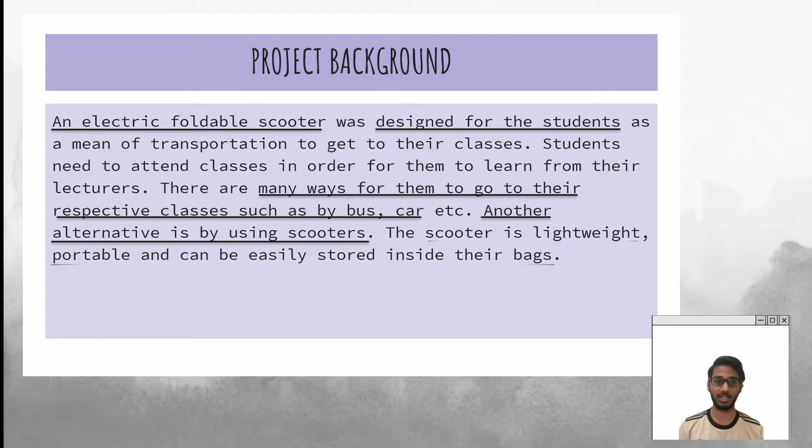Students will actually have many ways to travel, like bus, cars, and etc. But then they can use another alternative, which is these electrical scooters. Why? Because it is very easy to use, with average speed which can bring you from one place to another within a certain time, meaning faster. And it's portable - easy to be stored and you can bring it anywhere.

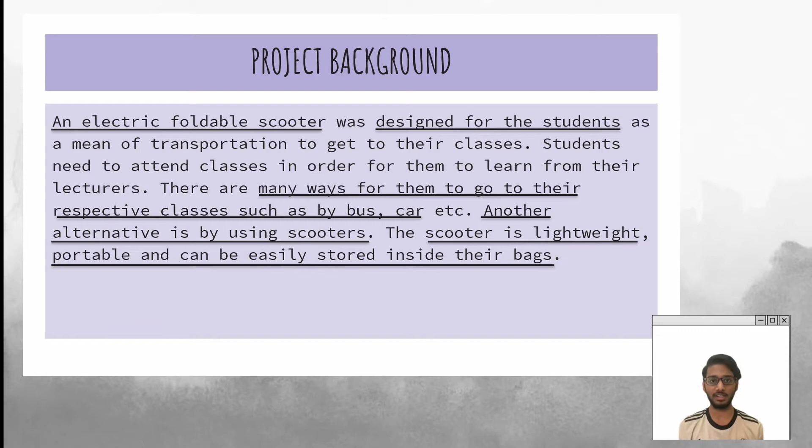Next one is background studies and needs. This means how it was previously and how we have improvised it with many other things. Let's talk about scooters back in the days, around 2000, 2007, 2008, 2009.

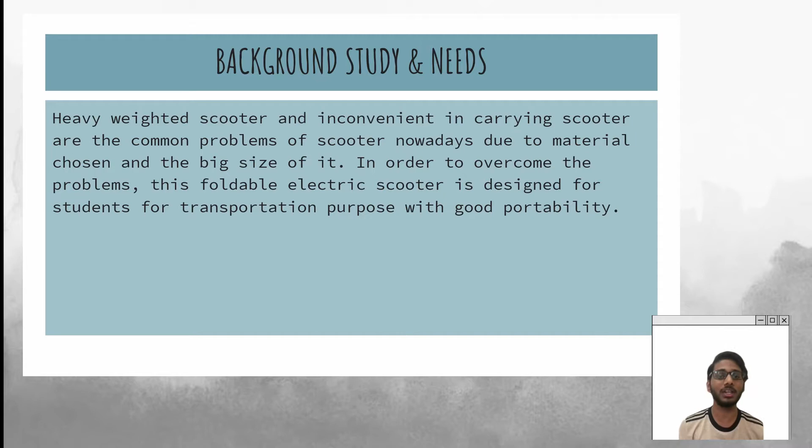Those days there weren't any electrical scooters. That means you move the scooter with human power, using your kick scooter - it was known as a kick scooter. Now it's not a kick scooter; we have made it powered by electrical energy. That means you don't need to kick the scooter to move it - you just need to use the electrical power supplied to move it. This is how we have improvised.

Another thing - those days scooters were heavy. Heavy means very hard to bring it anywhere, very hard to move, because if the weight increases, the speed decreases. That means if it's heavy, it's more difficult to kick the scooter for it to move faster compared to now.

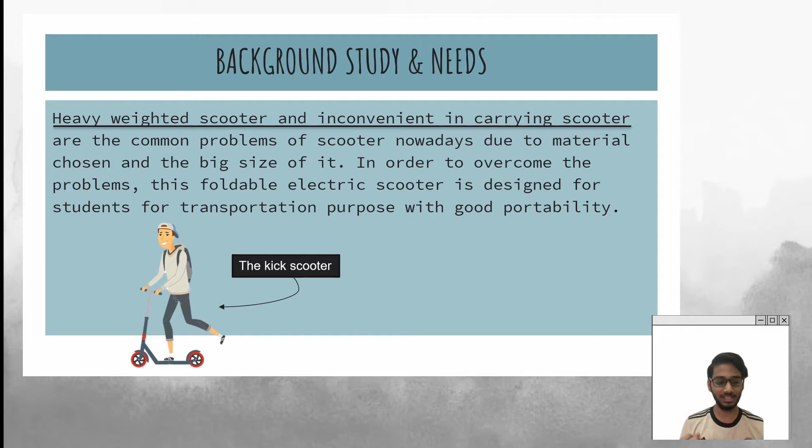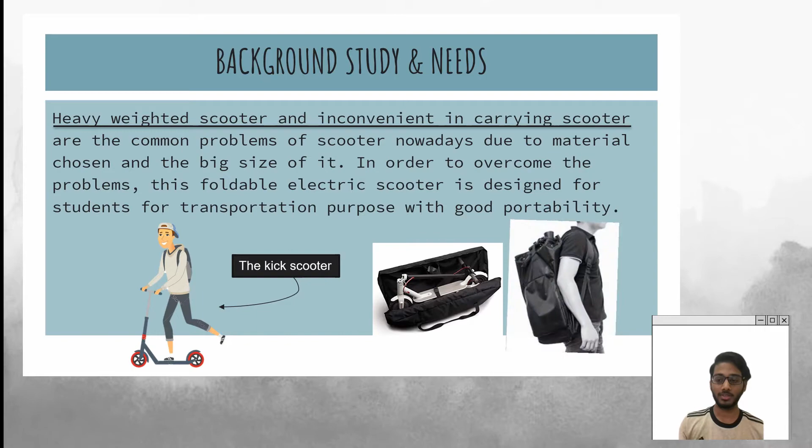Now the scooter is light. Another thing that has been improvised is it's foldable - foldable in certain ways where you can store them in a small bag and bring the bag anywhere. So if you want to use the scooter, you can bring it anywhere and use it.

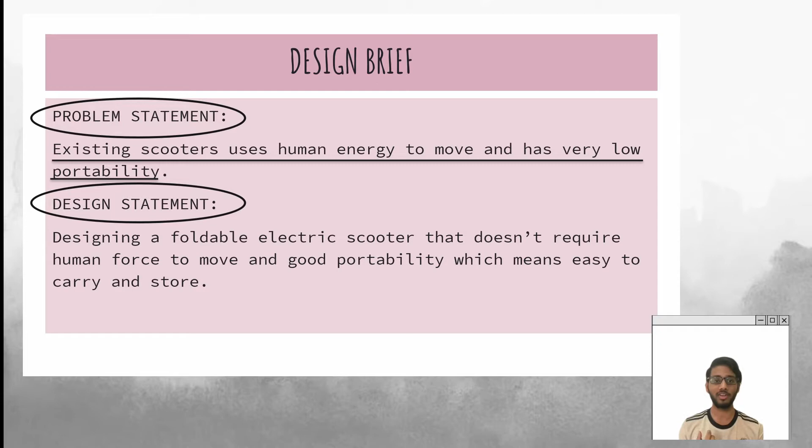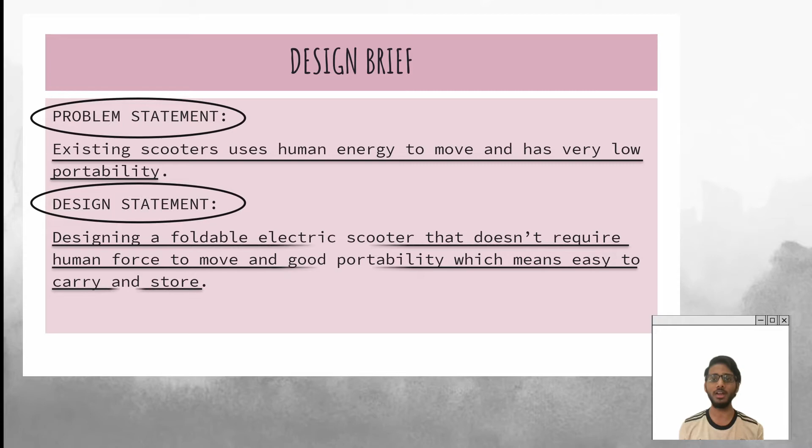Design brief consists of two statements: the problem statement and the design statement. The problem statement is whatever problems we are facing now using the current existing scooter - existing scooters use human energy to move and have very low portability. So the design statement is designing a foldable electrical scooter that doesn't require human force to move and has good portability, meaning it is easy to carry and store.

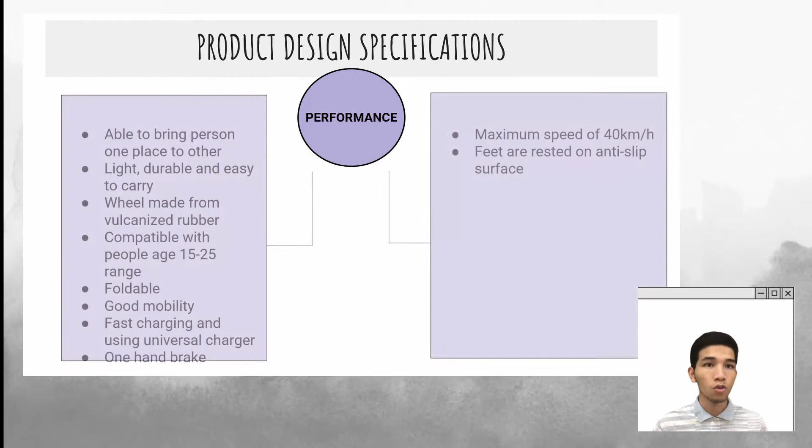Product design specification: first is performance. What we need in the scooter is it must be light, durable and easy to carry. Also, it needs to be foldable, have good mobility, fast charging using a universal charger, and have one handbrake.

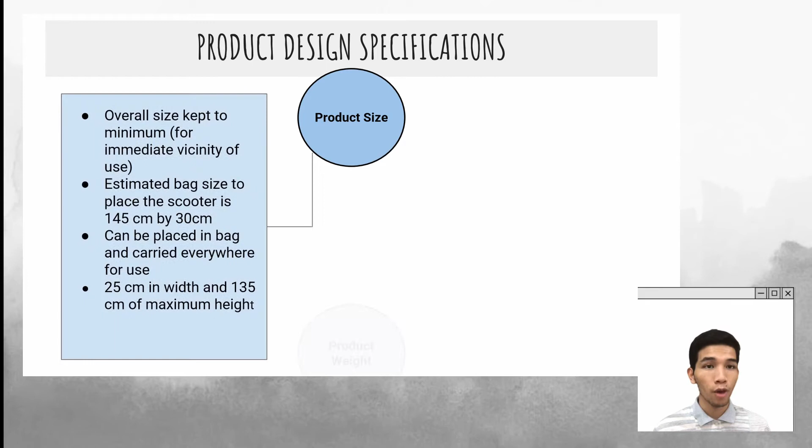The second PDS item is product size - the overall size of the scooter must be kept to a minimum so it can be placed in a bag and carried everywhere for use. The third is product weight - we need to keep the scooter as light as possible for easy carrying everywhere.

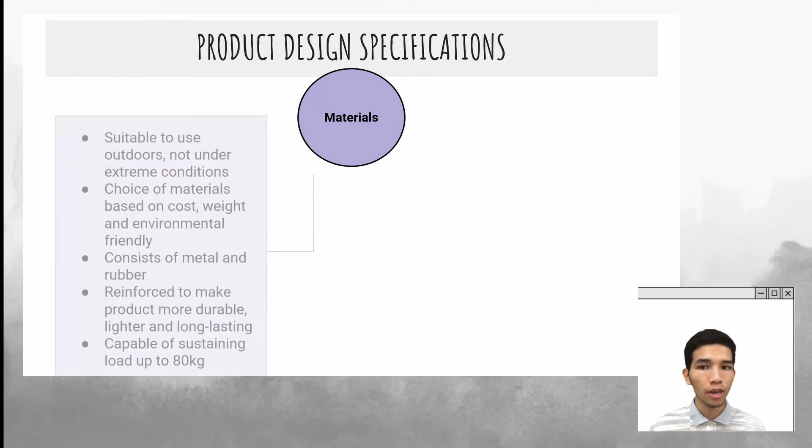Next, in PDS we have materials - the scooter consists of metal and rubber, reinforced to make the product more durable, lighter and long lasting. Next is product cost - the scooter can cost up to RM1024, including manufacturing costs and material costs.

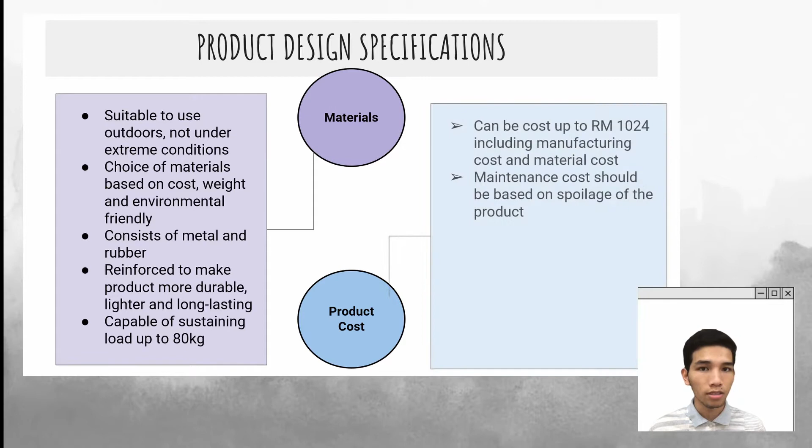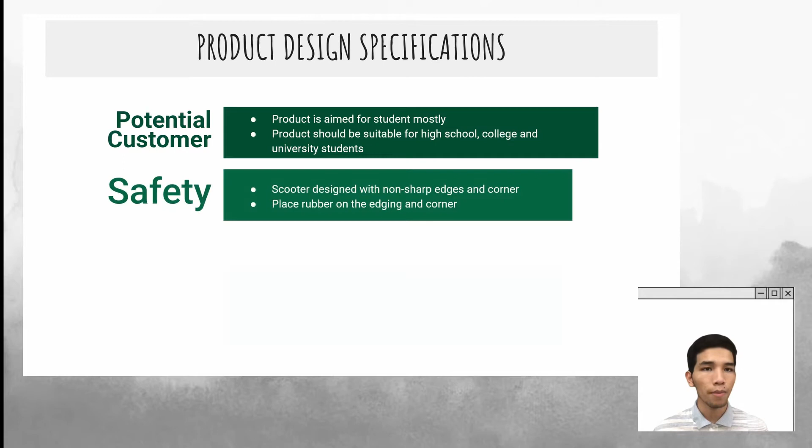Furthermore, in PDS we have potential customer - the scooter is aimed mostly for students and suitable for high school, college and university students. The safety factor is that the scooter is designed with non-sharp edges and corners, and for aesthetics, the scooter should be presentable and captivating, designed with minimum and no clumsy mechanism visible around the scooter.

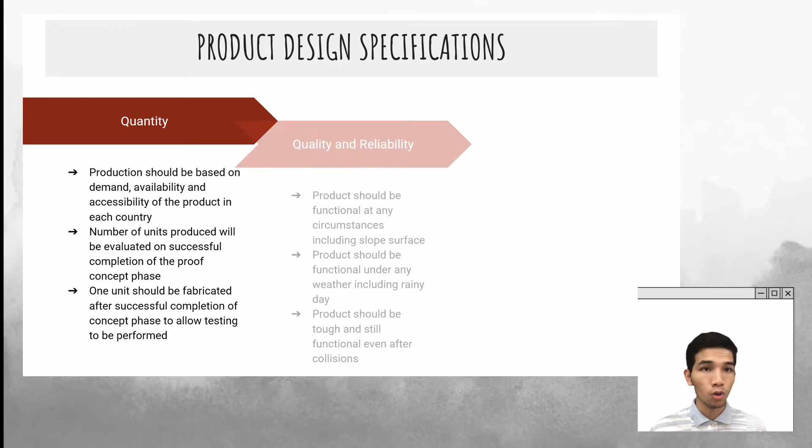Next, in PDS, we have quantity, which is the production should be based on demand, availability and accessibility of the product in each country. We continue with quality and reliability, which is the product should be tough and still functional even after collision.

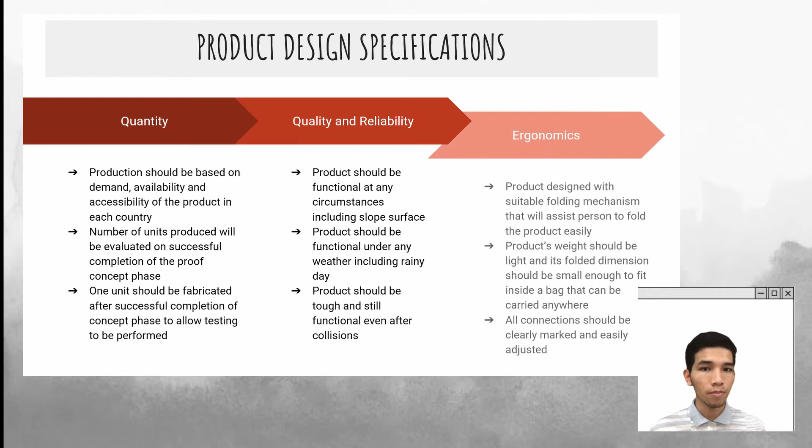And finally, in ergonomics, for this slide, we have product designed with suitable folding mechanism that will assist a person to fold that product easily. Next, in PDS, we have testing, which is the product should have a model to test the quality and check any inability.

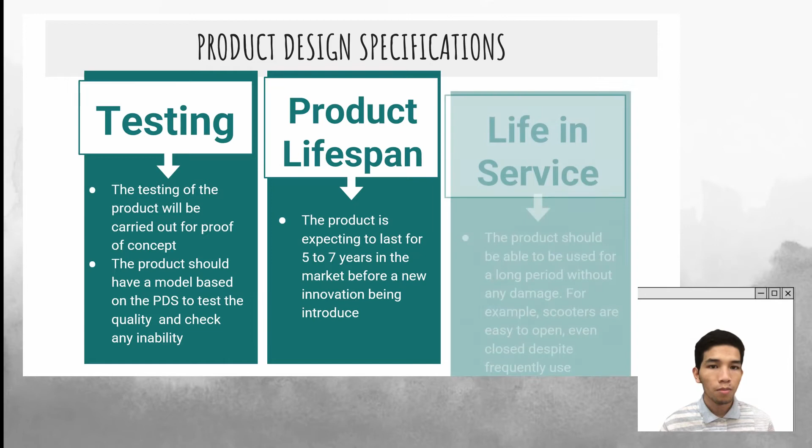Next, we have product lifespan, which is the product should last up to 5 to 7 years before a new innovation is introduced. And for life in service, the product should be able to be used for a long time without any damage. Next, in PDS, we have maintenance, which is the maintenance of the product should not be costly.

For the time scale, it takes 10 to 12 weeks to complete the project. And for legislation, it should obey regulations, one of which is the Consumer Protection Act 1999.

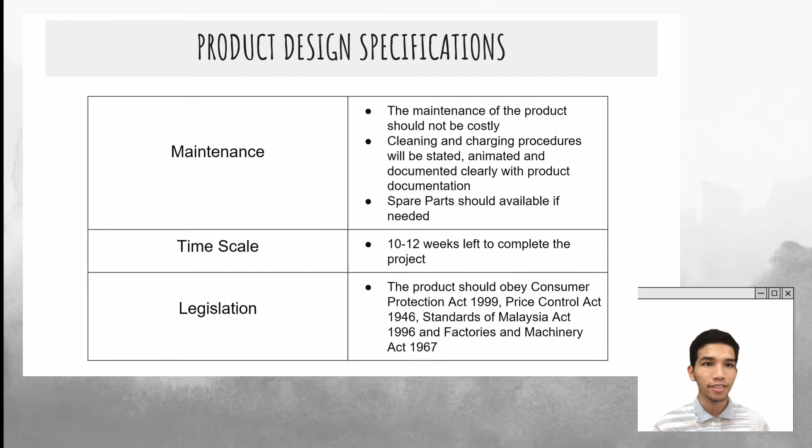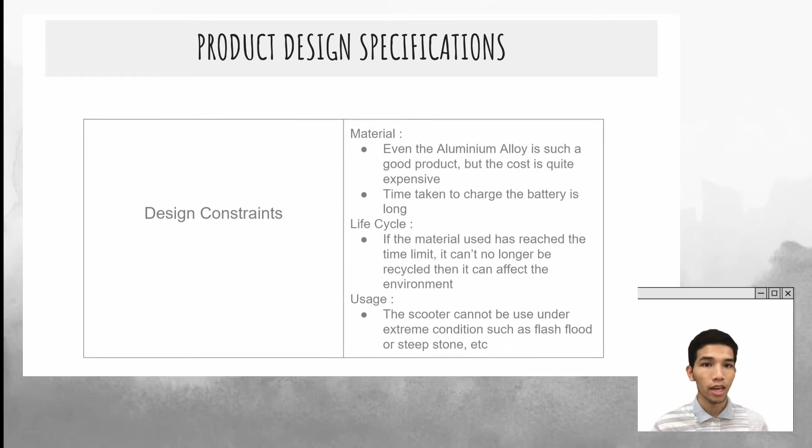Last but not least, in PDS, we have design constraints, and first is material, which is even though the aluminium alloy is such a good product, the cost for the material is quite expensive. And next is usage. The scooter cannot be used under extreme conditions such as flash flood or steep stone and other else. And that's the final point of design constraints.

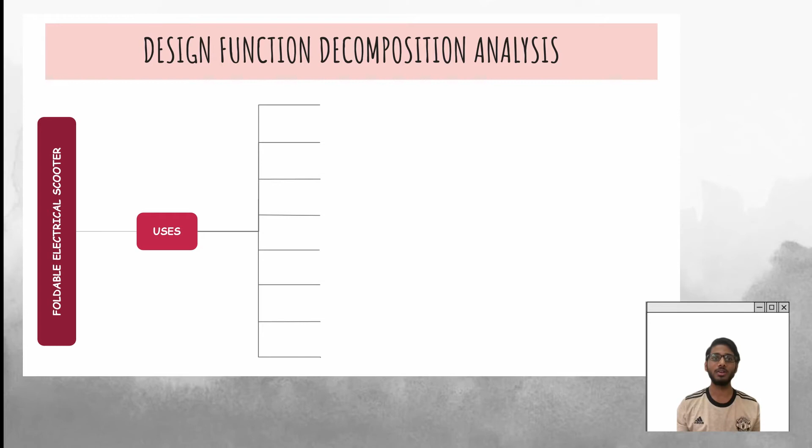Let's talk about design function decomposition analysis. This basically tells you the parts of the scooter and what each part is designed for, what is the use of the parts. So the foldable electrical scooter has a few parts, which are the frame, brakes, regulator, handlebar, deck, battery, tire and motor.

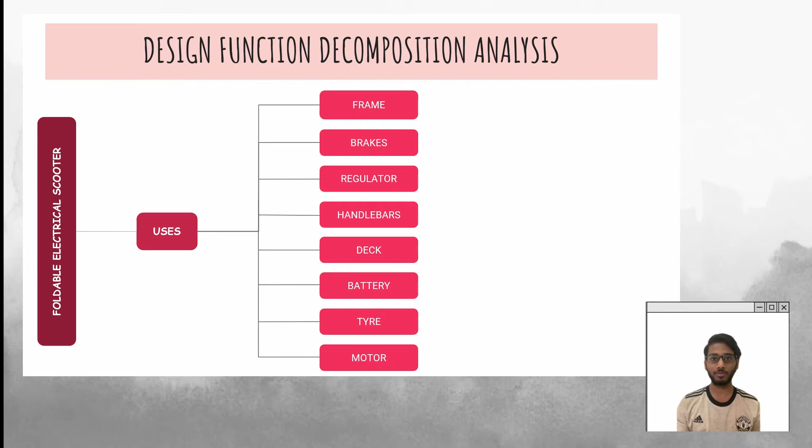The use of the frame is designed for how the scooter looks. That means if it has 2 tires or 4 tires, as in like some aesthetic looks and stuff like that. So brake is, I think it's quite common in all vehicles, to slow down the vehicle.

Handlebar is to steer and control the direction of the vehicle. The handlebar means you can turn left, turn right, go straight, stop, for you to control basically.

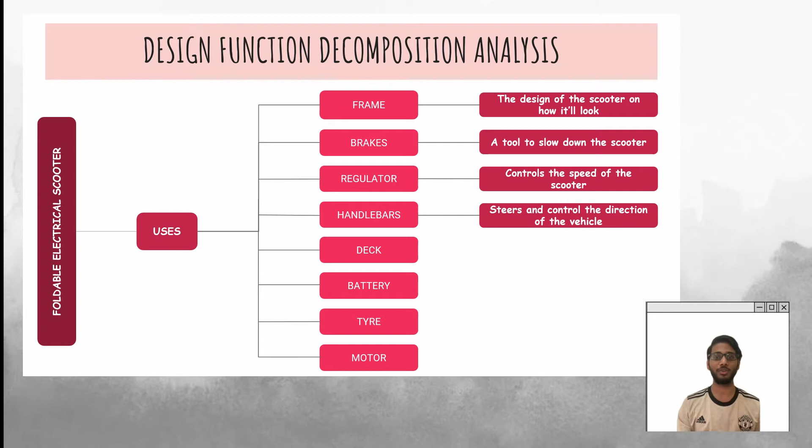So the deck is where you place your legs on. That means where you stand is called the deck. Used for a battery, it's a power supply for the scooter, as the scooter is electrically powered.

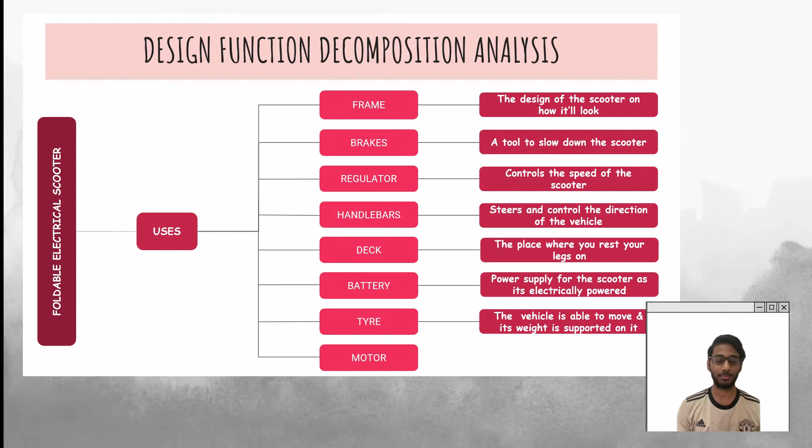Tire is basically to move the scooter, and then it supports the scooter, supports our weight also, because that's where the weight will be exerted. And then motor is the performance for the scooter, which means it runs the tires as well, rotates the wheels as well.

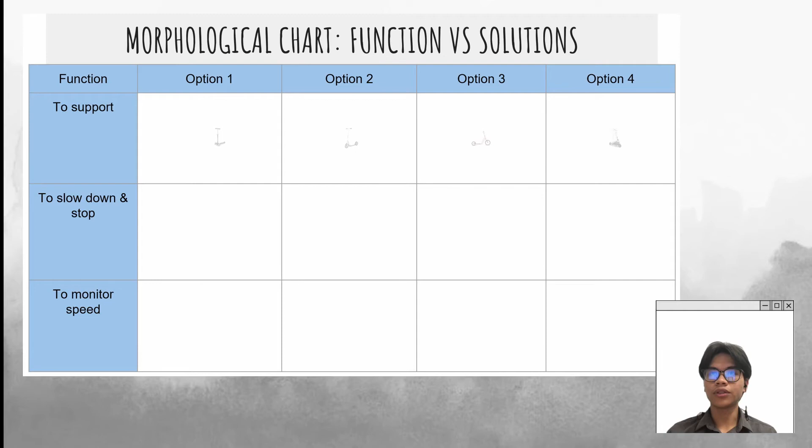I will be presenting about the morphological chart of our group. Firstly, as we can see, there are 9 functions, each with a few options to choose from. Starting from the first function, which is the support of the scooter, or the overall design of how the scooter is going to look. Each option differs from each other either by the number or the position of the tires.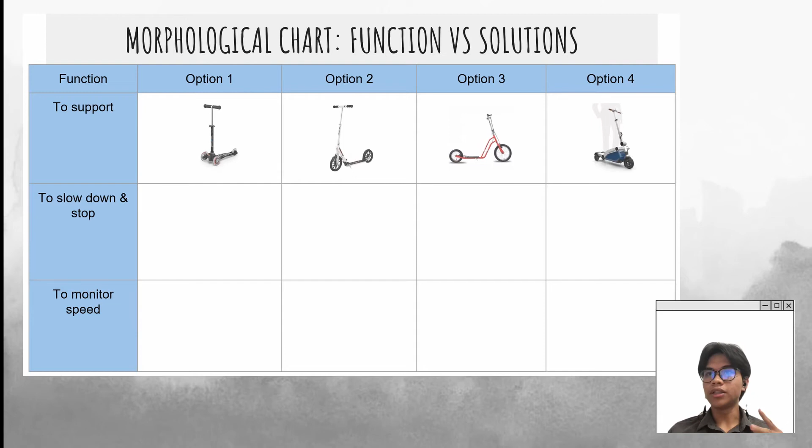Option 1 and 4 have 3 tires, but option 1 has 2 tires on the front, while option 4 has 2 tires on the back. Option 2 and 3 have 2 tires, but the design of option 3 looks more like a fusion of a scooter and a bicycle.

Moving on to the next function, which is to slow down and stop. There are a total of 3 options to choose from. Firstly is by using our foot. A shock absorber, which is placed at the top of the back tires, will be stepped on to either slow down or stop the scooter. A disc brake or drum brake will be placed at the tire, and we can control it by a handbrake at the handlebar.

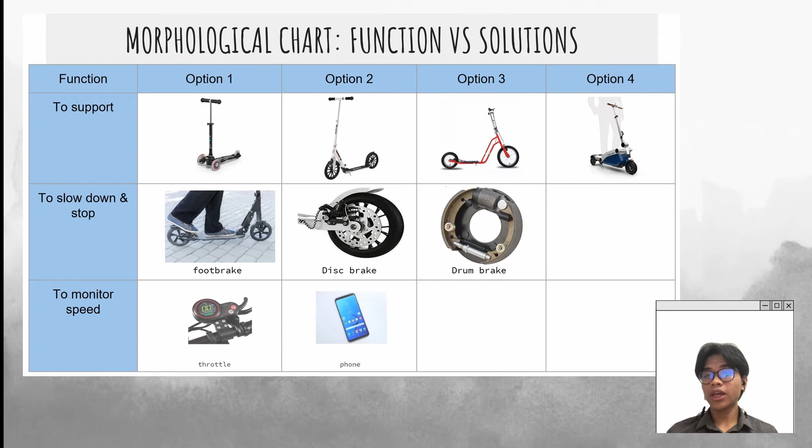Next is to monitor the speed of the scooter. We choose to use either a throttle or a phone for our scooter. The throttle will have a digital display of the speed of the scooter. As for the phone, we can connect the phone to the scooter to have a real-time display of the scooter speed.

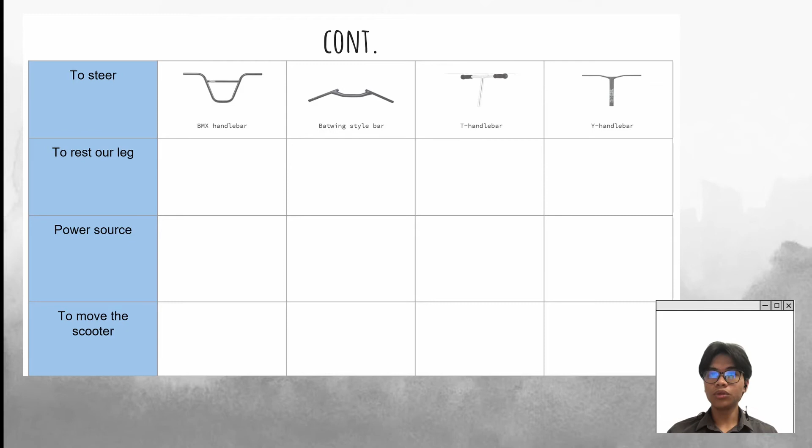To steer the scooter, we have come up with 4 options to go with. We have the BMX handlebar, batwing style bar, a T-handlebar, and a Y-handlebar, as we can see from the table, each with their own unique shape that will affect the efficiency of steering the scooter.

We also included the function to rest our leg while using the scooter, which is basically the deck of the scooter. The type of materials used on the deck will affect the overall weight of the scooter, since it covers the most part of the scooter.

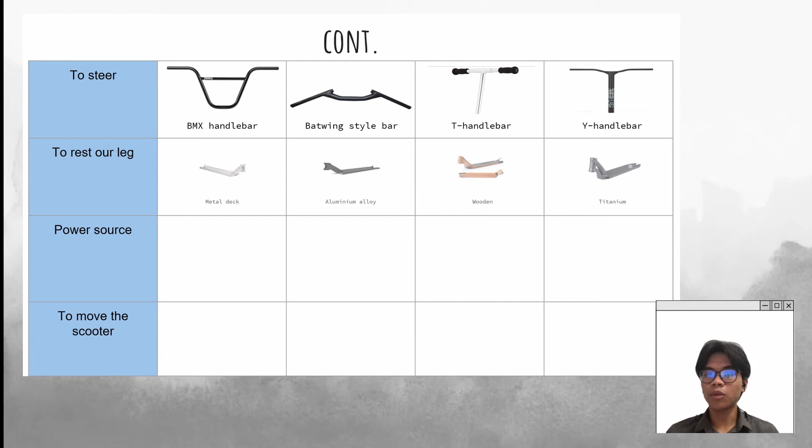The materials that we chose for the deck are metal, aluminium alloy, wooden, and titanium.

The source of power for the scooter will either be lithium-ion, lead acid, nickel metal hydride, and lithium polymer. Each power source will provide the power needed to move the scooter. The most efficient one will be chosen for our scooter.

The next function is to move the scooter, which is the type of tires that will be used. We have 4 options to go with: the off-road tire, which is suitable for all types of terrain, the tubeless tire, which is an air-packed tire, a honeycomb tire, and lastly the solid tire, which in contrast to the tubeless tire does not have air inside it.

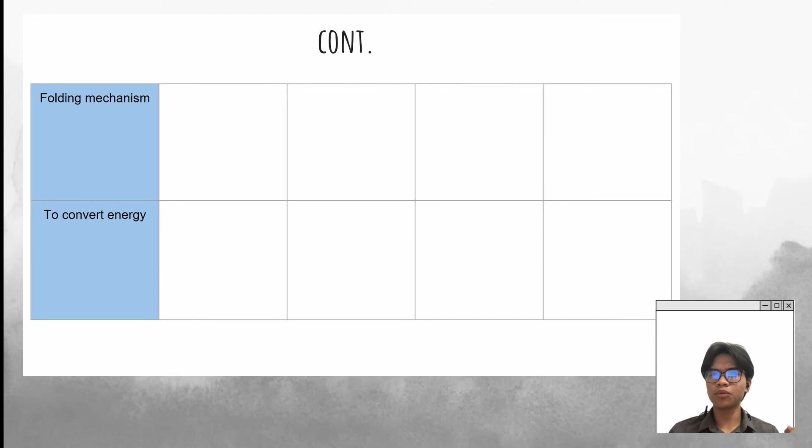Since we're designing a foldable scooter, we have a few options to fold it: a simple push button, a lock lever system, a kick and fold mechanism, and a ring buckle system. The option that is easiest and most user-friendly will be implemented on our scooter.

Lastly, an energy converter to convert electrical energy from the power source to kinetic energy to make the scooter move. We have either a brushless DC motor, a brushed DC motor, or a hub drive motor.

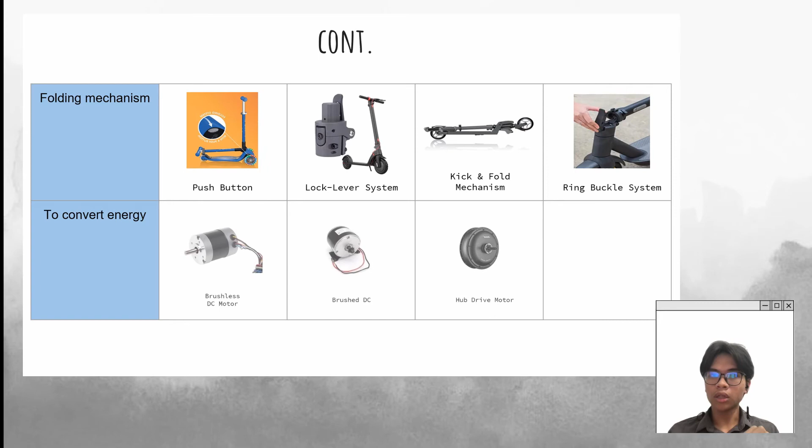The screening matrix is a filtering stage to choose some of the best designs among all the products. For an electric scooter, the required selection criteria are durability, waterproof, easy to carry, easy to fold, fast charging, brake, product lifespan, speed monitoring, stability, motor, tire, and type of handle — a total of 12 criteria.

In our case, the screening matrix is carried out twice to choose the 3 best designs to proceed to the next stage, which is the scoring matrix.

For the first screening matrix, there are 15 designs to be filtered, and Design 3 is the datum for reference in filtering the electric scooter.

As a result, designs 9 and 14 qualify directly to the second screening matrix. Design 2 will combine with Design 15, 3 with 6, 7 with 13, and 11 with 12. Besides, Design 4 is revised to be a better design.

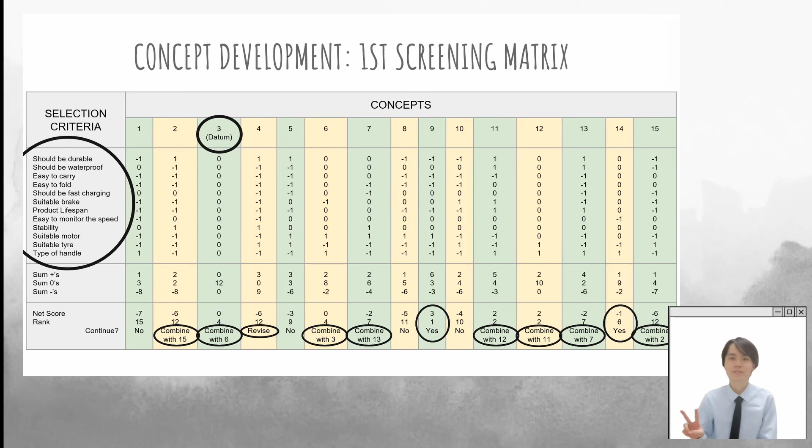For the second screening matrix, there are 8 designs to be filtered, including Design 3, which is the datum. As a result, designs 7 with 13, 11 with 12, and 9 are the 3 designs chosen to move into the next stage.

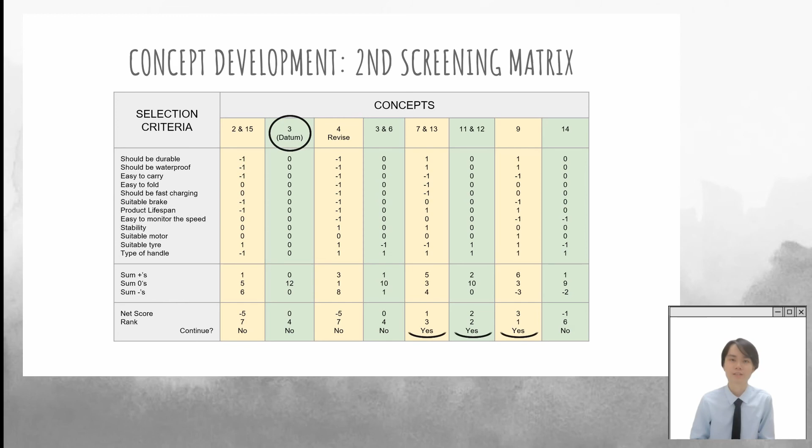After the screening matrix, the last process is the scoring matrix. The purpose of this process is to know which one will be our final design. The concept scoring is used to increase resolution and better differentiate among the competing concepts.

In the table, we must have the selection matrix, criteria, and weights. How to do it? Firstly, rate the concepts using the rating system. Our datum is our reference.

As you can see on the rating system: the first one is much worse, the second is worse, the third is same, the fourth is better, and the fifth is much better.

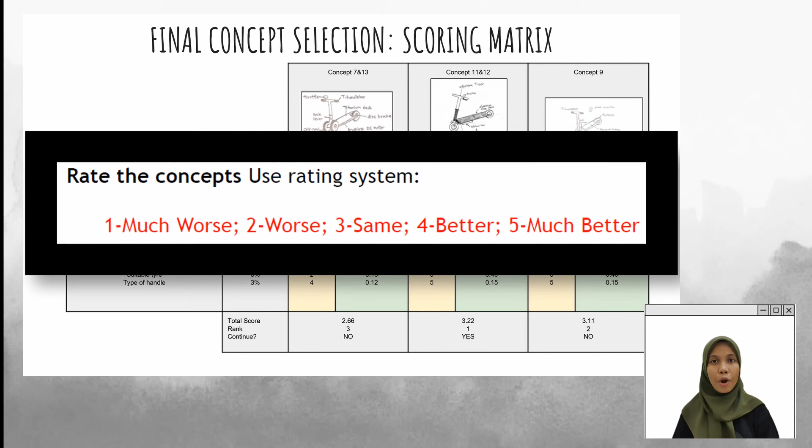Then rank the concept by multiplying each rating by its weight. The total weight is 100%. After that, sum each design to get the total score. Lastly, rank the concepts based on the highest sum.

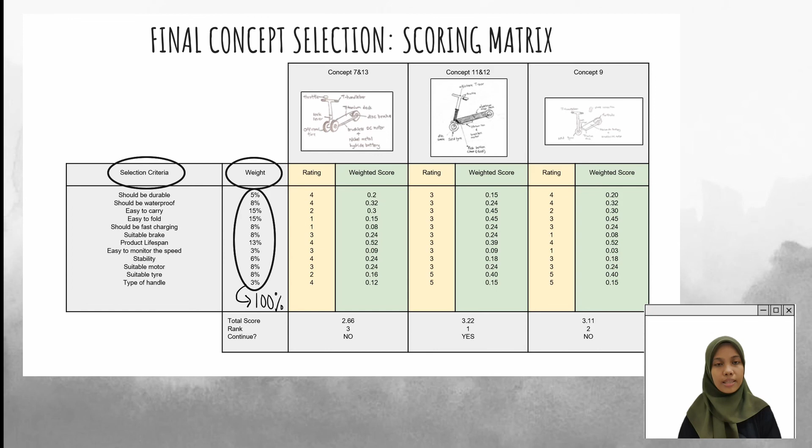As you can see on the table, the concept design of 11 and 12 gets the highest sum. In addition, the criteria content for this process is just the same as the screening matrix, not changing at all.

Here are some new designs that we got after doing the screening matrix. The first is the combination of 3 and 6. The second is the combination of 7 and 13. The third is the combination of 2 and 15. The fourth is the combination of 11 and 12.

Not only that, we also have the revised design number 4, which will improve the materials and other parts. So in conclusion, there are some steps before we get the final product.

The first step is to do the product design specification, construct the morphological chart, then do the screening and scoring matrix. Each process depends on the other. So if we don't do the product design specification, we can't do the morphological chart and the rest. It all depends on each other.

As we can see, product design specification is the most important thing because it is the guideline before we get the final product of our scooter.